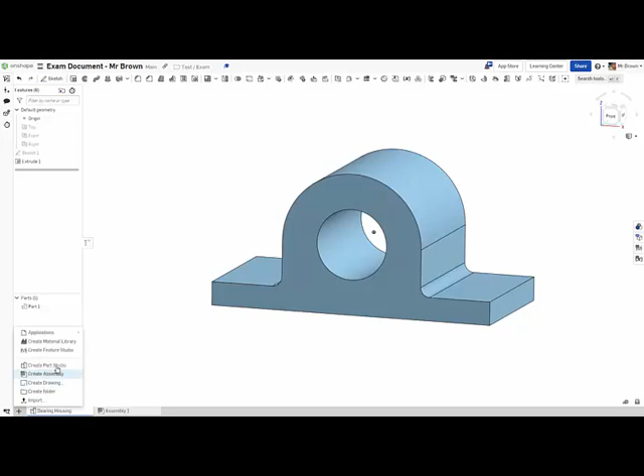The second video we're going to draw a disc brake. So we might come down here to Part Studio, right click, click rename, and we'll type bearing housing. We're going to come down here and go to the plus, create Part Studio. The new one that pops up, right click, rename, disc brake.

The disc brake is this picture in your exam booklet, so it's this one here. You can use these measurements. I'll be using these measurements to draw this.

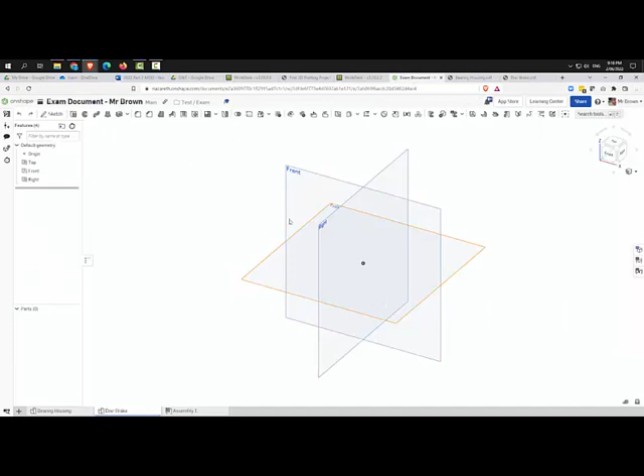Instead of the front, we're going to draw on the top. So sketch, click top up here, and then click top. And then we're going to come to center point circle.

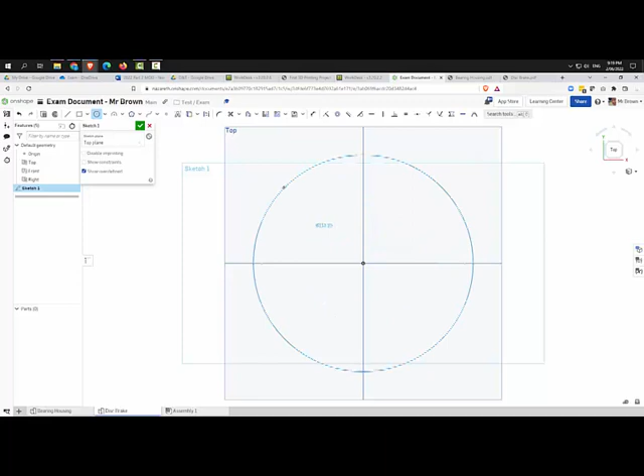Now, this drawing is all about circles. Everything in it is a circle. So we're going to start with our first circle. We'll draw the biggest one first and work our way in: 230, 230. And then it's already highlighted.

We're going to draw another circle. We're going to make it 130. And then we're going to draw another circle, and we're going to make this one 100.

Alright, we're going to draw another circle off that origin point too. I'm just going to press P on my keyboard to get rid of the planes. But this time this one's going to be a construction. We're going to click origin point and click up here. I'm going to escape, or right click and escape, circle so it's still blue and I can move it.

I'm going to press D on the keyboard and go from the center point to the center of this circle, to there. Okay, and it's going to be 87.5. I'm just going to move that so it's easier to read.

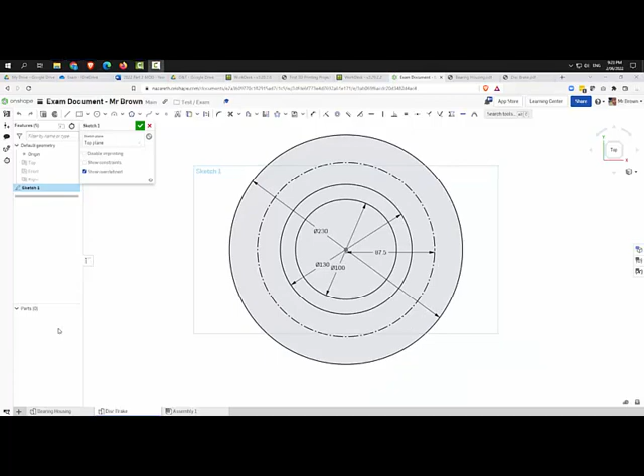So our next step: the next thing that we want to do is make these outside circles. So we're going to grab a circle. The measurement for this circle, we need to click - sorry, I'll slow down - we need to click when we've highlighted this construction line. Click out, and we're going to call that 15.

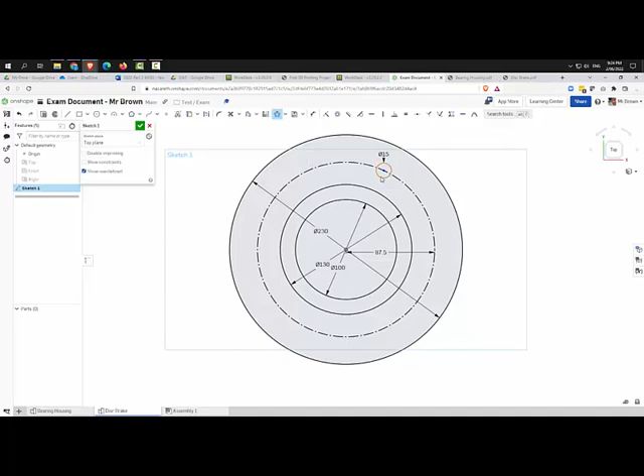Now we're going to come up here to pattern and click circular pattern, and we're going to click this circle. You'll see that 3 appear, but we actually want 8. And once you've got 8, that's exactly what you want.

Now you'll notice that you can move the middle. We want the middle on the origin point, and click the green tick. The circles are still blue, so we still have a little bit of work to do.

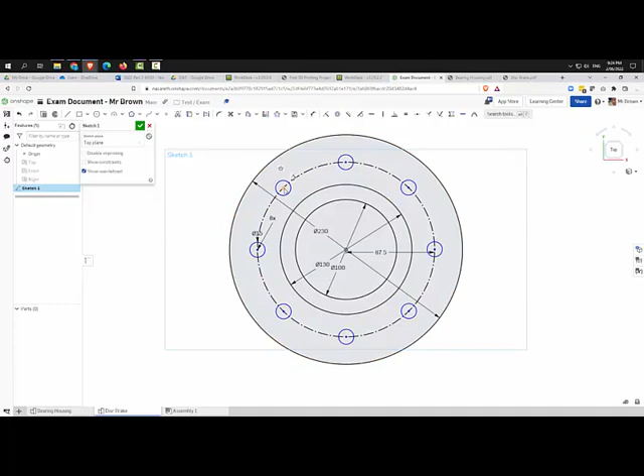What I want you to do is grab the center of one of the circles and drag it. So you'll see on mine that they still want to move around. They sort of want to dance around that center point.

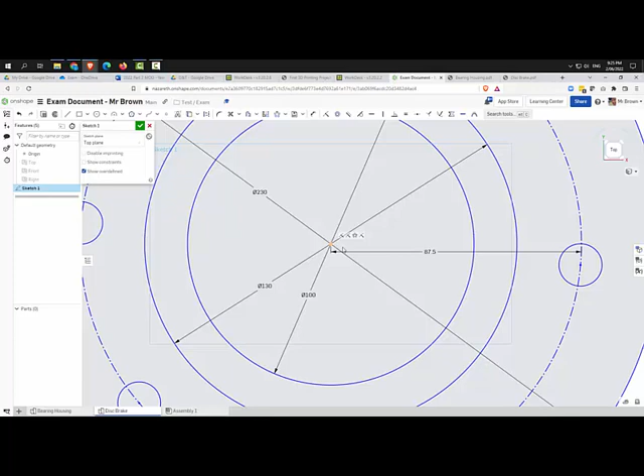If yours doesn't want to stay on the center point when you drag it - let me see if I can... whoops. You need to click, so drag them off, find the center of the dots, it'll be blue, click coincident, click that point and then the origin point, and that will make it stay. Or you can do what I did before, which was play with it before you click the button.

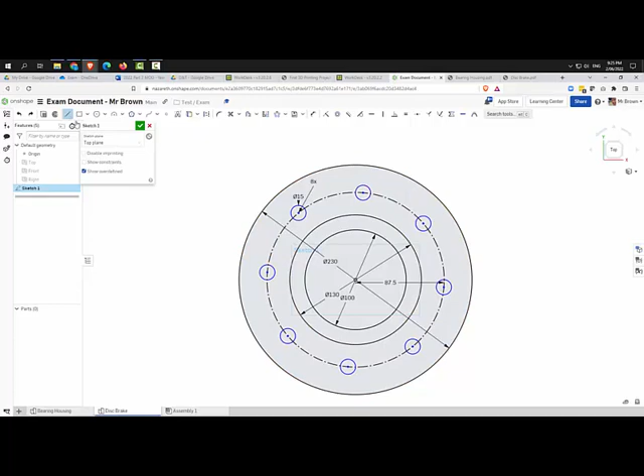Okay, the next thing that we need to do is draw a construction line. So from this dot, we're going to go straight up and we might stop there. There's no point in going any further. So we've got a construction line: line, then construction, then straight up.

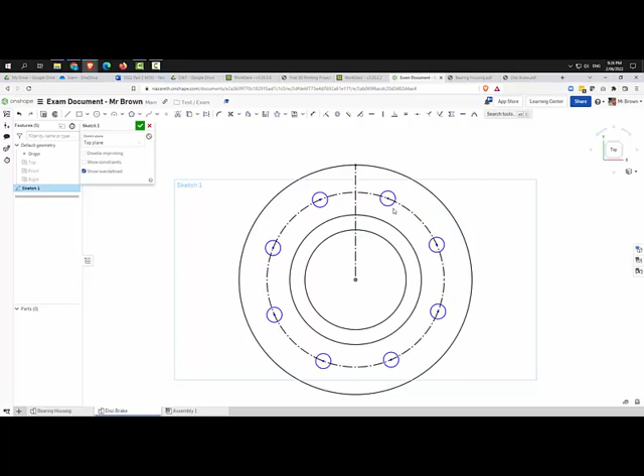And we're going to move these circles so they're about there. We're going to grab another construction line and go from this point to that point, so we're sort of joining those top two center dots.

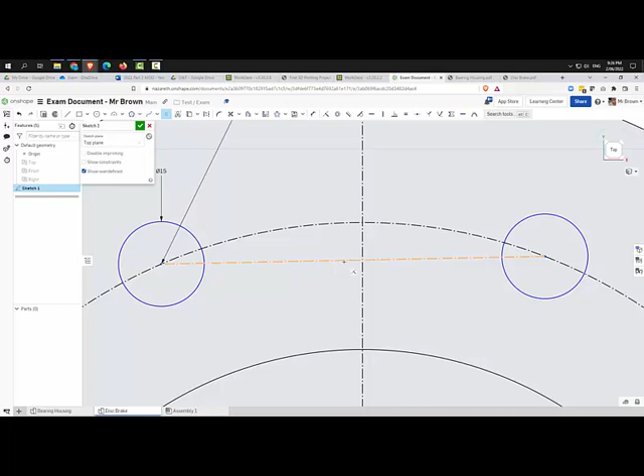We're going to come up and grab a point, zoom into our line, and when we see the square on the line - it's hard to pick up, but it doesn't actually make it bigger when I zoom in - I want you to click there. So that's the center of that line.

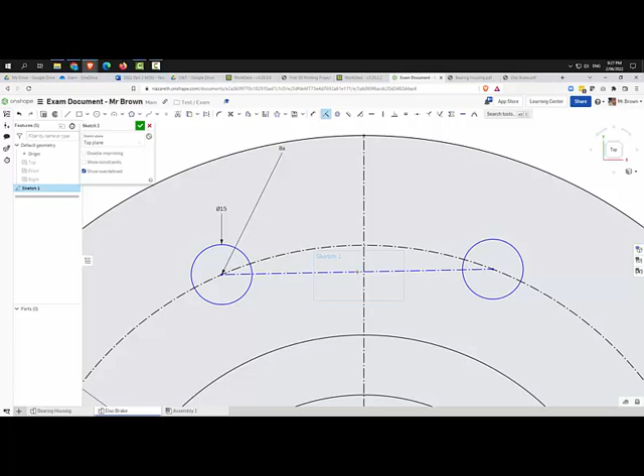The next thing that we're going to do is coincident that dot with that line, and you'll see that they all go black. That means they're fully constrained and it's done. Alright, let's click the tick. We might go up to isometric for this part.

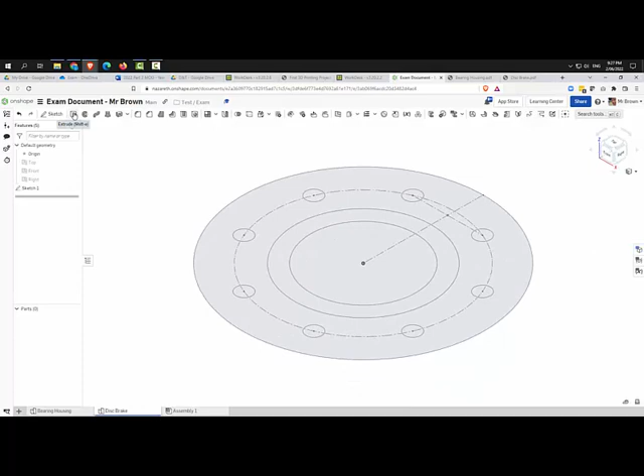So the next thing to do is to extrude. We're going to extrude probably just this bit. And this looks perfect, except we're going to change our depth from 25 to 15. Click the tick. Okay, you'll notice that our sketch is gone.

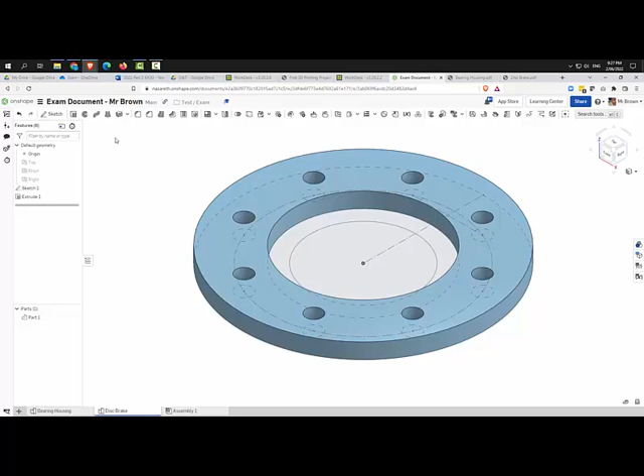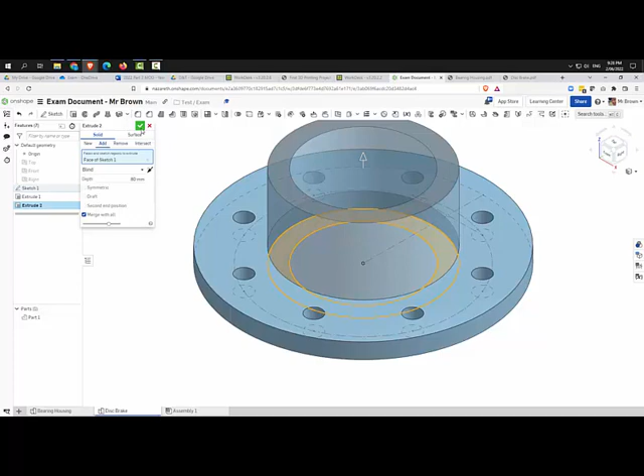We need to turn it back on, so come up here to the eye, click the eye, come up here to extrude, click this ring, and instead of 25, we're going to make this 80, and we make sure that it's add, and you can click merge with all, and then click the tick. You can also turn the sketch off here.

And there's your disc brake. So this goes on cars with disc brakes, and it's a part that helps stop the car when the brakes are applied. Brake pads clamp onto this, and that's what helps stop the car.